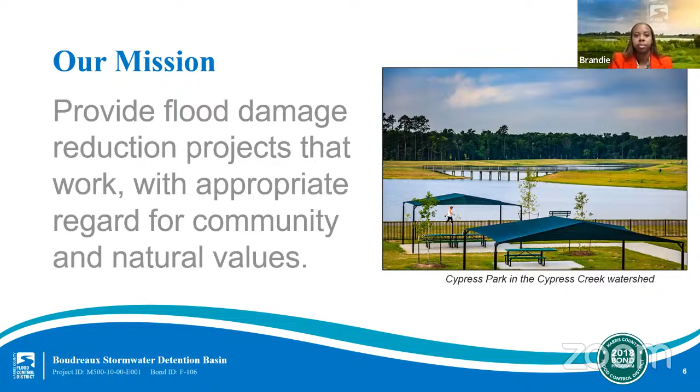Harris County includes 23 main watersheds totaling approximately 1,800 square miles and more than 2,500 linear miles of channel. 2,500 miles is approximately the distance from New York to California.

A watershed is a geographical region of land that drains to a common channel or outlet. Each watershed has its own unique characteristics and needs. The project we will be presenting tonight is the Willow Creek Watershed, located in Northwest Harris County.

Harris County and the surrounding area is flood prone for a number of reasons. Namely, we experience extreme rainfall events, including tropical storms and hurricanes. Our area is largely made up of flat, slow draining land, and we have large concentrations of soil that do not soak up excess rainfall quickly.

While the Flood Control District plays a critical role in flood risk reduction, we are one of several entities involved in these efforts in our region. When rain falls on your roof, it flows through several jurisdictions, such as streets and drains managed by the Harris County Engineering Department, a municipal utility district, or a city like the City of Houston, before it flows into a larger channel, creek, or bayou that the Flood Control District owns and maintains. This slide illustrates the various jurisdictions, which sometimes we even share with other entities.

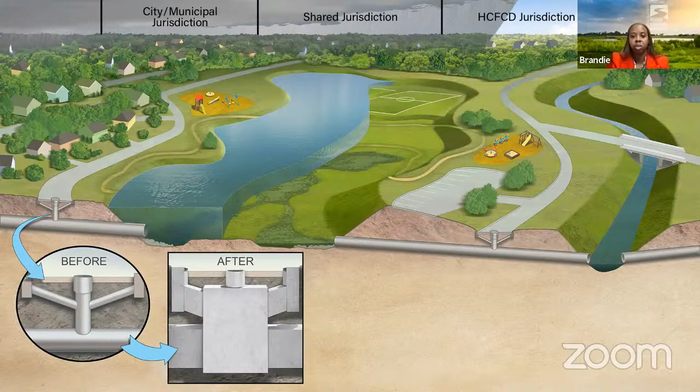In the middle is a stormwater detention basin, sometimes constructed by the Flood Control District. When storm sewers on the left are increased, this creates an increase in runoff. Since it is our policy to avoid any adverse impacts from our projects, detention basins help to safely take in and temporarily store excess stormwater during heavy rain events. Often we partner with Harris County precincts, utility districts, and others to add recreational amenities such as trails to these basins and along our channels.

On August 25th, 2018, Harris County voters approved $2.5 billion in bonds for flood risk reduction projects. This vote followed a series of 23 meetings with community members across Harris County, one per watershed, which resulted in a list of what is now 181 bond projects. A total of more than $1.35 billion in partnership funding has been secured so far to stretch the 2018 bond program even further. The actual timing of each individual project will depend on a variety of factors, including environmental permitting, right-of-way acquisition, and utility relocation, and in some cases, requirements of a particular grant. Project lists and project schedules are updated regularly on our website.

As the bond projects move forward, we're making significant progress toward resilience in Harris County. We shared an update with the Harris County Commissioners Court in January of this year and highlighted a few notable stats. We've completed or closed 27 projects, secured $1.43 billion in partnership funding to stretch the bond funds even further for our community, and hosted more than 180 community engagement meetings. Your input is critical to our efforts, and we want to ensure our conversation continues. We'll continue these biannual updates moving forward to share progress on the program.

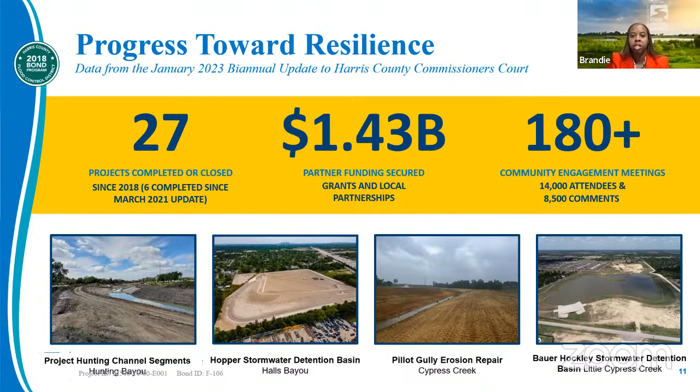Each agency has its own definition of eligible projects, and its own requirements for local match funding. So the Flood Control District works diligently to match projects to the right partnership opportunities.

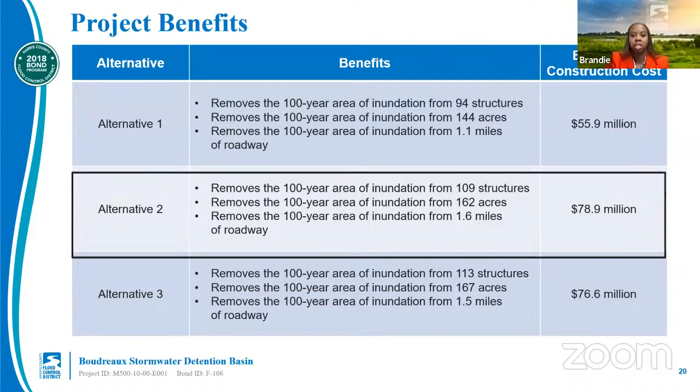Throughout this project, we have coordinated with Harris County Engineering and Harris County Precinct 3 on road projects in the area, including the Holderrieth Road Extension and the Boudreaux Road Alignment projects. For more information on road projects in the area, please consult the Harris County Engineering website at www.eng.hctx.net.

Now let's take a look at the project's life cycle outlook for this project and our next steps. The life cycle of an individual project typically starts with a feasibility study, in which a drainage problem is identified along with the type of flood risk reduction project to address that problem. In this case, it was the Willow Creek Planning Study.

The project is developed in more detail during the preliminary engineering stage. During this stage, an environmental clearance must be obtained. We then acquire any needed right-of-way and work through utility relocations if needed. The final three stages are design, construction, and operation and maintenance.

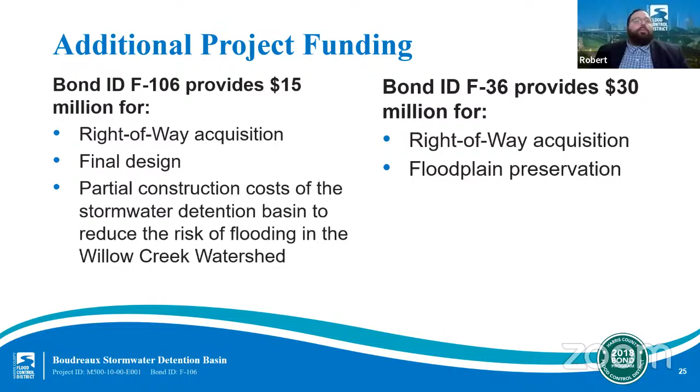You can find information at our website, www.hcfcd.org/F-71.

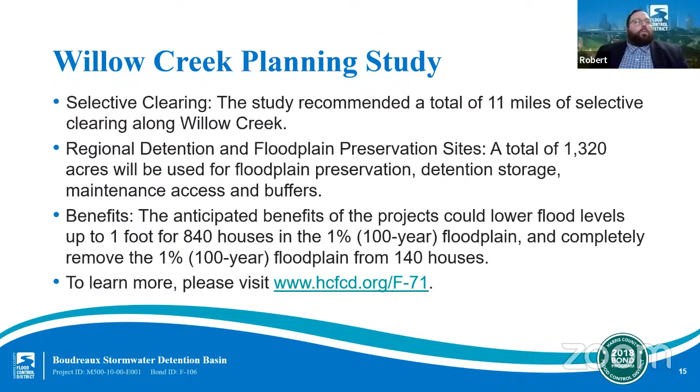Although this project will reduce the risk of flooding in the area, the risk of flooding will remain. The Flood Control District recommends that everyone in Harris County and surrounding areas have flood insurance to insure against the possibility of personal and financial losses. Please visit our website at www.hcfcd.org/MAAPNEXT to learn about the Flood Control District's MAAPnext initiative, which aims to produce Harris County's most comprehensive and complete set of flood hazard maps and information.

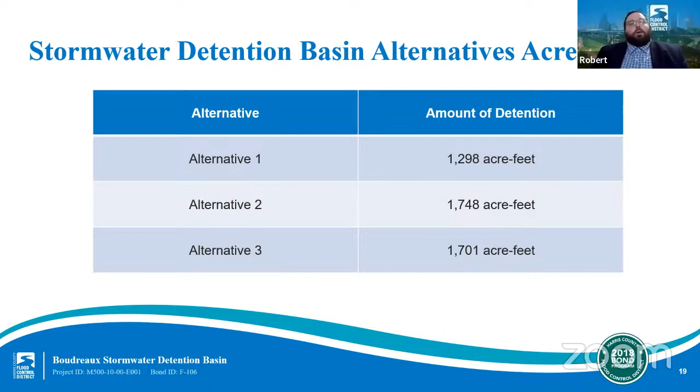All right, thank you Kyle. Our next question is for Brandie. Brandie, is the flood control district working with any partners on this project?

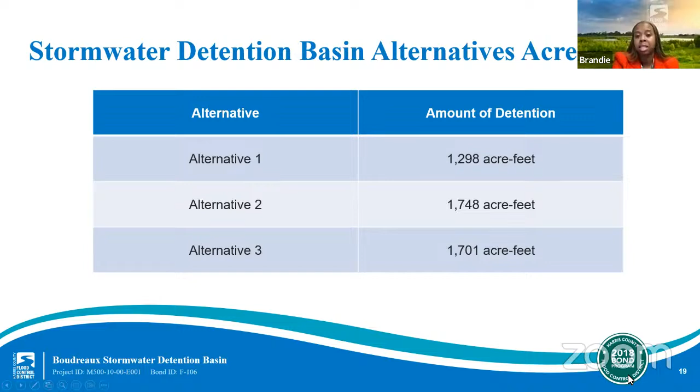The flood control district is not partnering with anybody, including Harris County Engineering or Harris County Precinct 3, on this particular project. However, we are coordinating with both of those entities as they are preparing or developing to expand the Holderieth Road and Boudreaux Road projects. If you'd like more information about those road projects, you can visit the Harris County Engineering website at www.eng.hctx.net.

All right, thank you Brandy. Our next question is also for you, Brandy. Mike asks, are there plans to widen Willow Creek given the increase of new construction? That is not a part of this project scope.

The flood control district is a no adverse impact entity, which means that whatever we construct, we cannot cause an adverse impact downstream. So this project will store the water so that when it's released back into the existing channel, it would not increase flows within that channel.

All right, thank you Brandy. Our next question is for Kyle. Kyle, what is the cost of the recommended alternative? The cost for alternative 2 is going to be $78.9 million.

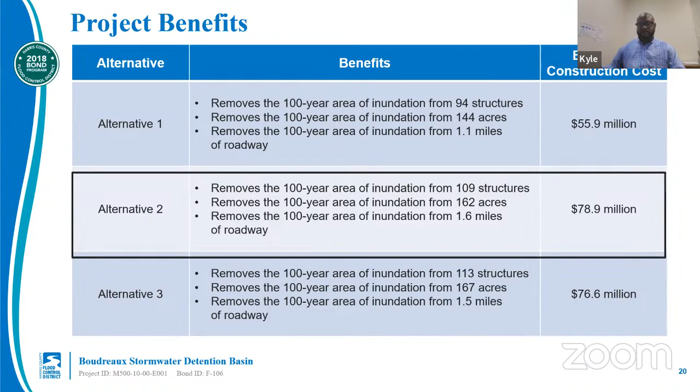All right, thank you Kyle. This next question is also for you. During your modeling, were there any areas that see recurrent flooding?

During your modeling of this project, were there any areas that saw recurrent flooding?

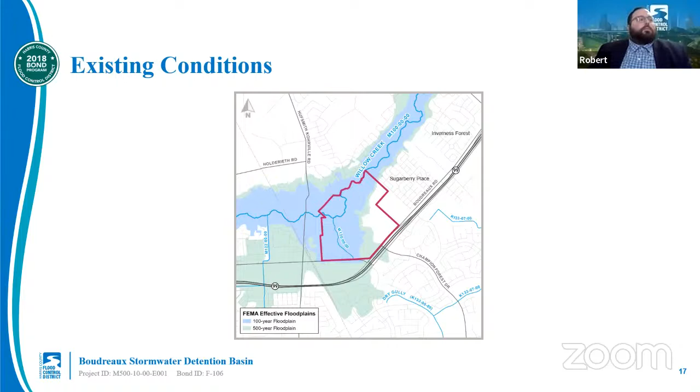Yeah, when we did the modeling, we saw recurrent flooding primarily in the lower reaches of Willow Creek near Sugarberry Place and Inverness Forest subdivisions.

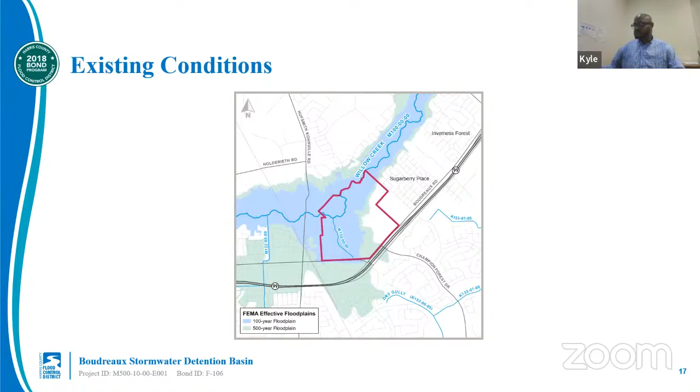All right, thank you, Kyle. This next question is for Brandy. Brandy, are there any historic flood events that have impacted this project area?

Yes, the Willow Creek watershed has experienced several historic flooding events. More recently, Hurricane Harvey in 2017, the Tax Day flood in 2016, Hurricane Ike in 2008, Tropical Storm Allison in 2001, and the flood that took place in October 1994.

So that's what the historic events that we've had. But before we move on to the next question, I know we received a lot of questions about work that's happening within the channel. Even though this particular project doesn't include any channel improvements or plans to do any channel improvements.

However, there is a separate clearing project by the Flood Control District that's looking to preserve the conveyance and capacity of the channel. I don't have any more details about that project as far as the timing and where that project status is right now. But when we do a full response after this meeting, we will try to have that information available to respond to those previous questions we've received.

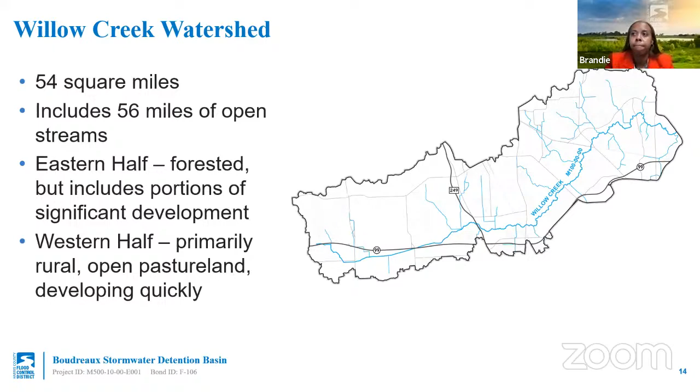All right, thank you, Brandy. Our next question is for Kyle. Kyle, does the recommended alternative include both wet and dry bottom basins? Yes, the recommended alternative includes both wet and dry features in several compartments of the basin.

All right, thanks Kyle. This next question is also for you. Is this project going to be done in phases, and if so, why? Yes, this project is going to be done in 3 phases, primarily because of limited funding and also right-of-way acquisition.

All right, thanks, Kyle. Our next question is for Brandie. Brandie, when will we have information on the project's construction impacts to this area?

You will find out more about the construction impact and schedule when we host an additional public meeting in the future to present the final design of the Boudreaux Stormwater Detention Basin, which is during the design stage. At that time, the flood control district will have a strong handle of the recommended alternatives of final design, including details of the project's construction impacts.

We also plan to have an additional community meeting to specifically discuss the CDBG funding later this year, where we can talk about some of the requirements and stipulations as they apply to that grant.

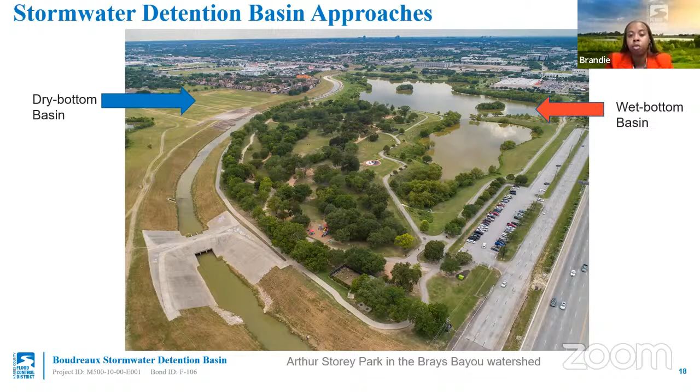All right, thank you, Brandy. It looks like one commenter tonight, Mike, says he fully supports this project and would like to have it move forward as soon as possible. Thank you, Mike. We support this project too.

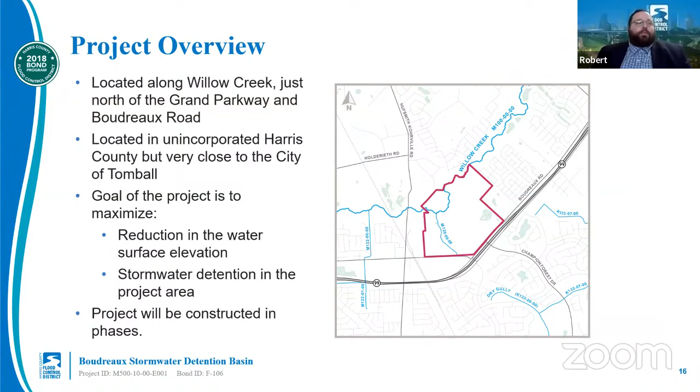Yes, all three alternatives include approximately 70 acres of preservation area that also provide a buffer on both banks of Willow Creek, referred to as M100, for preservation of the riparian forest and natural habitat of that channel.

All three alternatives were found to require a federal individual permit to mitigate the environmental impacts to waters of the U.S., WOTUS, for constructing the ultimate phases.

The initial phase for alternatives 1 and 2 avoids wetland impacts, since most of the jurisdictional wetlands are concentrated on the east side of the property, and impacts to the M120 channel are avoided to reduce environmental permitting challenges.

So we're trying to preserve the wetlands as much as possible, not only providing a preservation area for this project, but for the entire study as a whole, making sure we keep the natural state along the channel as much as possible.

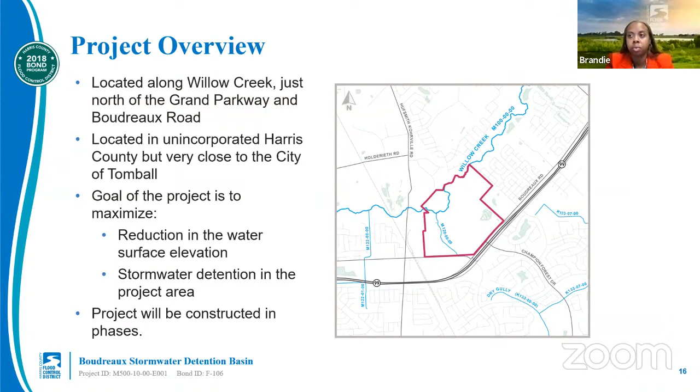All right, thanks, Brandie. We are at 7:29 right now. We have time for one last question. Kyle, this next question is for you. What stage of the project life cycle is the Boudreaux project?

Okay, the Boudreaux Stormwater Detention Basin is currently in our PER phase. During this stage, we develop the project further from the feasibility stage and also obtain any needed environmental permitting. After that, we'll work to acquire any right-of-way and work through utility relocations as needed.